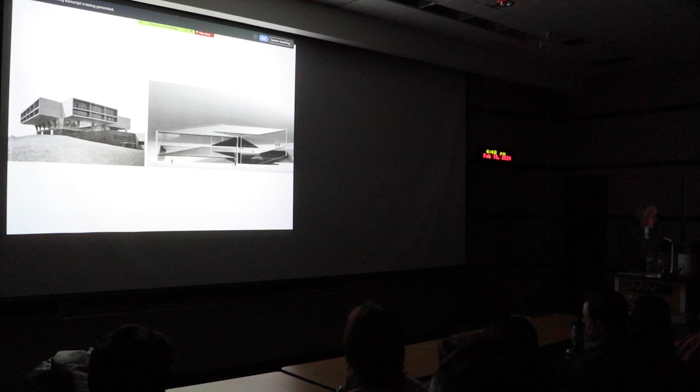As I mentioned, I came from Milwaukee, and as I was coming of age, this is Eero Saarinen's Milwaukee Art Museum. And so this is what I grew up with. And coincidentally, when I was working with Gunnar Birkerts, one of my early mentors as well, my first project there was to be the lead designer on the Houston Contemporary Art Museum, which is what the maquette on the right is generating.

This is a client that I've worked with for 50 years. This was an early patio. So the house on the left, this was a simple call, and you've got to sort of put yourself out there early at one level and have confidence in what you're doing. And for some strange reason, I called the local newspaper in Phoenix, where I lived for more than 50 years, and I had this first patio.

And I called the editor and said, hey, are you interested, how about take a look at it, I'll talk to you about it, let's see what happens. Well, there was a story that ran. It was a little whole budget was $10,000 with a little triangular configuration, putting together an odd-shaped backyard. And Rocky saw that article in the paper, and that became part of a lifelong friendship and a journey, and you'll see Rocky's name pop up several times this evening.

But I drove up to the house on the left, and here's a visionary statement. Never met this man in my life.

I walk into the backyard, and he basically looked to the back fence line at houses that look just like his across the way, and said, I want to screen the expletive house behind me. That's your program, okay? How do you do that? I want to make them go away.

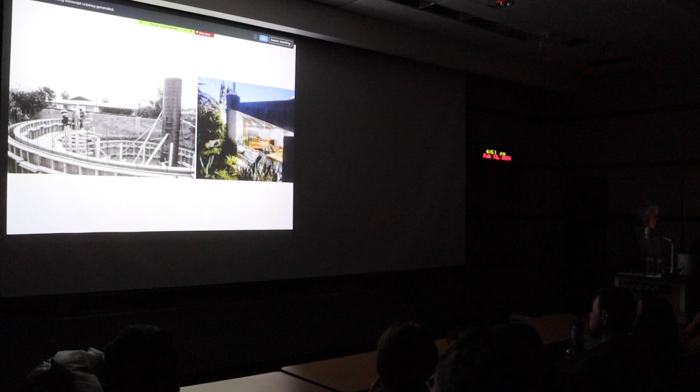So it's always been about making, it's about tools, it's about materials, it's about understanding those things. And again, inspired by my set of mentors and things like that. Definitely, hopefully there's roots that you can discover seeing that.

And then you get your first job, and you get your license, and you're ready to hang up your shingle. And I had one project. It was a $10,000 budget on a cabin that would sleep 13 people in Flagstaff, Arizona.

And this is the Galloway cabin. And there you can see the evolution that happened. The whole thing was built in 4 weeks. It finished over the course of a period of time, and it was ongoing.

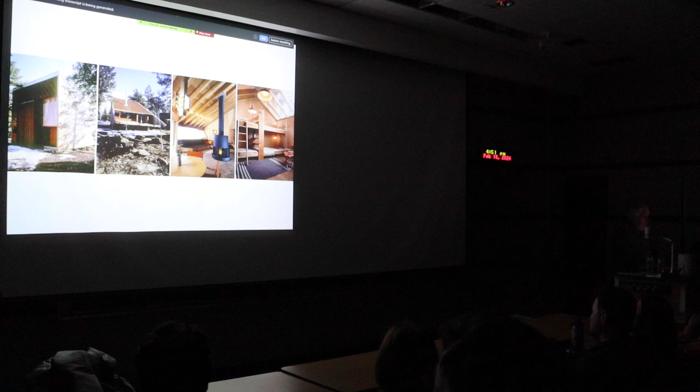And at that same moment that cabin is rising as one of my first projects, I had acquired 10 acres of land north of Phoenix, a place called New River. And this is my home there that was built in 4 weeks in the summer.

And my studio was a small structure on the left. I lived on the section that you see the interior of. It cantilevers over the desert. It had a budget of $12,000.

And a couple years later, under the rainbow, I built a studio that took a little more time and a little more energy, but not a lot. And that became home where I would work for many, many years.

So then a random series of images here. Again, this is way before computers. I traveled, I looked at lots of things. You can't go and see enough examples of things you admire, and some you'll be thrilled with, some you'll be disappointed with, but it's about constantly seeing as you journey not just through your student days, but through your life.

So this was for a sheet metal worker that was doing some work on my house, and one day I came to the job site, different job site, and said, my wife and I have been talking. We just got this parcel. Would you consider doing a house for us? I was flattered. It was great. It was wonderful. I got this master metal worker.

I've got this man with a great appetite for making things, and he's wanting me to design a house for his family. And so these 3 foot thick stone walls that you see delineated at the perimeter of this triangle here are desert masonry, in the spirit of what Taliesin was all about. And he proceeded to assemble this 15,000 pound steel 3-dimensional sculpture on the ground next to it.

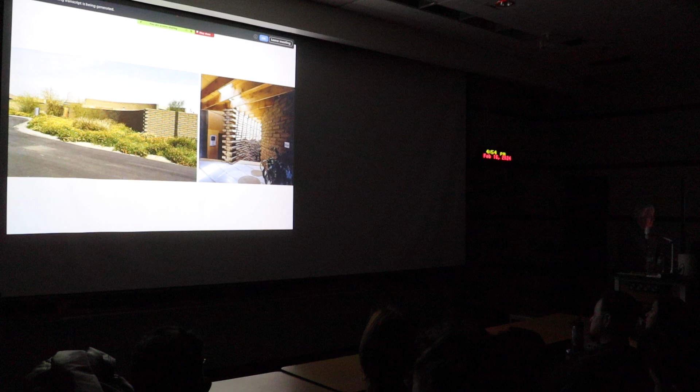The broken block house—again I got into this weird thing that was interesting, and a lot of my clients didn't have budgets at all. So suddenly I got the idea: why don't we just get a bunch of broken block, assemble them, and sandblast that configuration. They wanted a stone house in the desert. This is in Cave Creek as well, and the random pattern of those broken block laid just by regular masons—they didn't have to think about being precise. So again, the effect was there in the broken block house.

First commercial work starts—suddenly you bump into a circumstance and something's there. This is one of my first commercial buildings, the J.L. Bamerlin Postal Credit Union. Those are 17-inch thick burnt adobe walls, and that's Cor-Ten—probably the first use of Cor-Ten in Arizona. In the middle image is an office corporate headquarters, a small building for Carver Air Conditioning. They were a sheet metal worker who put up a Butler building and decided they needed some office space. So this became the office space on the front of a Butler building on Washington Street in Phoenix, Arizona.

And on the right, I do car washes, and I say that proudly, okay? I had another client, Jerry Weiss, who was caught up in the whole energy of it, and he said, would you be willing to do a car wash? That's after Central Library had happened and a whole bunch of things. It's a project, a building, an opportunity—somebody with the vision and courage to go somewhere. So on the right you see a simple diagram of 2 cantilevered weathered steel beams and a rolled conveyor belt cover assembly, not unlike the office building. It's a car wash—the Weiss Guys car wash up on Glendale, just west of the freeway in Phoenix.

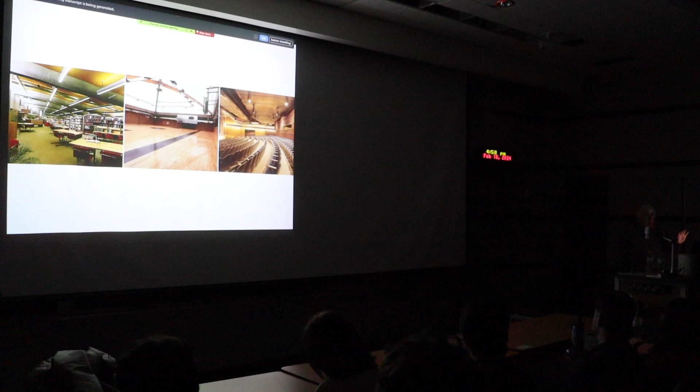And then we have the Phoenix Day School for the Deaf, a gymnasium and a theater—very simple, very low budget. But budget should never be your excuse not to do architecture. Never let 'the budget isn't big enough' be an excuse for what you get. What you should always give is what you can optimally give, respecting the budget, because it won't get built if it's not. But again, small or large, always push yourself to an edge.

Where it came from in my mind, I don't know. I had some very special mentors, but somehow early on in my development I got this inkling—with my maverick background, where would it come from? But I was going to get a Rome Prize and go to the American Academy in Rome when I could. Literally the day I was eligible for that possibility, I sent off my little portfolio. I was going to do this big elaborate portfolio, but it ended up going in a little 3-ring binder. Because I said I was going to do it, I did it—it wasn't the fancy binder I might have dreamed of.

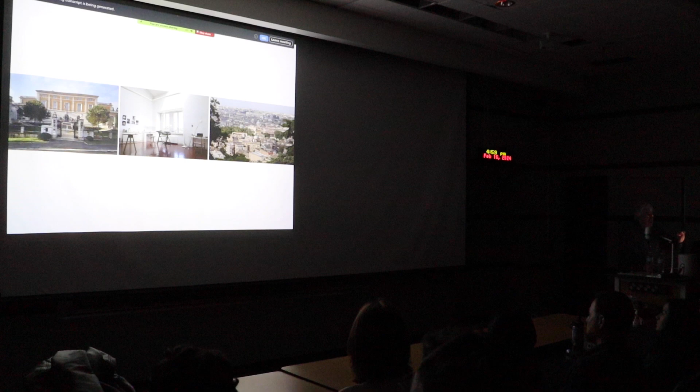Somehow they looked through that portfolio and my proposal of work I had done, and I ended up spending 6 months there—my studio was right over the central gate, on the top floor, and you see the view from that. In 6 months, I gave myself the privilege of expanding myself to a place I'd never been. There was a very deep impact from the work of Carlo Scarpa, of course. But again, a turning point—I sort of look at my life as being pre-Rome and post-Rome, and I mean that with important sincerity.

This is an earthen dam. This is the Deer Valley Rock Art Center. The petroglyphs on the left—there were 7,000 petroglyphs etched into the desert varnish on the mountain on the west side. Where the earthen dam that was part of a Corps of Engineers project would collide with the mountain is where the simple little geometry of a museum telling the story would happen.

It's tilt-up concrete. You can see how the joint configuration is there. You come along the edge of it as you approach the site. You park your car, go through this funnel-like form, come out this serpentine path down to the rock art location at the south end. And that's the Deer Valley Rock Art Center.

Again, tilt-up concrete, but the coating of those panels takes on their unique quality, not only because of the geometries that you see happening, but that coating is copper slag. So it's a waste material.

I wanted rough texture. At that time I was possibly even teaching here, and I had a project with students near Superior, Arizona. I remember driving by the copper slag from the smelters over there. All of a sudden you're thinking about this thing, trying to really make it of the land and the space. This mountain is covered with these black varnished desert rocks where the petroglyphs are pecked through. So it seemed like the ideal circumstance to complement the situation was to use this throwaway material on the face that was down in the casting beds.

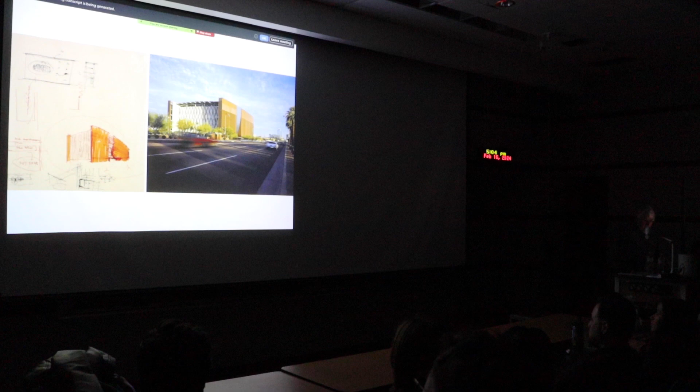Which is 280,000 square feet. It was done for $97 a square foot when it was completed in the 90s. So again, it's pushing the max—no excuses about where things are at. The copper skin of the library, and again, the metaphor.

A mesa from Monument Valley. It sits on the landscape above the freeway of Phoenix. It is copper clad because, again, what's a more precious material when you think about Arizona? It comes from this place, copper.

The technology for this rusticated skin, the heavy roll texture, was rolled by grain elevator manufacturing techniques. So the same galvanized metal grain elevators you see all around Arizona—I asked them, they never did it, but they were obviously not going to have a problem rolling copper. It's much softer, much easier to do. The whole skin of this library is clad in grain elevator siding and press form truck siding in copper.

The south side, and again, I guess I've always been thinking and dreaming and beyond, and taking the opportunity that's there. So I have this project suddenly, and who do I call to be my consulting engineering team? You saw in the early projects, I've always respected my engineers and gone to the max.

But I really respected the work of Ove Arup and Associates. From the Sydney Opera House to Centre Pompidou, their name is attached with the great architects of our time on all those projects. So what can they say if you call them and ask if they'd be interested in being on your team? It's a $28 million project, a studio of 6 people, but you called. And they said yes. They said, but you don't have to get up so early—because I was making the phone call and they knew it was about 5 in the morning here to call England and their offices.

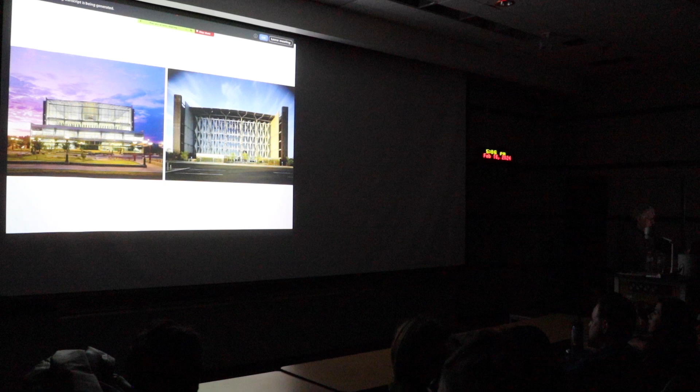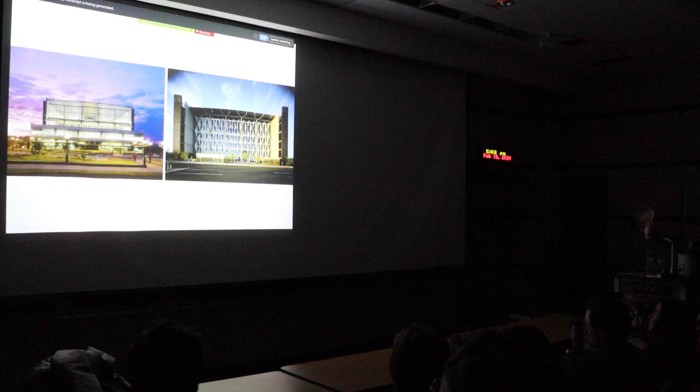The south side was operable, with a computer-programmed horizontal louvers for the south sun. The north side was a different aspect of sun control, so there's these sculptural fabric shade sails. It was a cable and steel rigging roof that spans across.

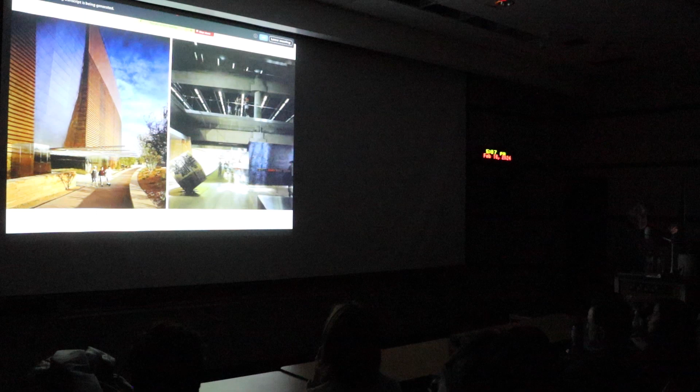In the simple diagram of it, behind these copper facades on both the east and west, those are called the saddlebags of service. So all the building services, including things like the restrooms, the janitor's closets, all the mechanical rooms, live in these bulbous sides on the east and west elevation, feeding to the center of the plan.

And there's this stainless steel canyon. These are stainless steel plates shingled down, much as Wright's houses for the Usonian period were done, the Pope-Leighey House years ago. So there's these shingles of 4-foot by 12-foot stainless steel sheets overlapping in the canyon cut through the mesa. And these great cantilevered beams give you the identity of the main entry on Central, and the main entry into the parking lot, which parks 408 cars.

You come down this compression into the canyon, and inside the mesa is literally a canyon that you are looking up to. You come down, there's light on your left side, there's this Venetian plaster on the right, just like Scarpa would have used. And this is looking down from the Crystal Canyon into the entry with 3 glass elevators rising from a reflecting pool in the center.

And again, I knew what the budget was. I knew it was less than $100 a square foot to meet all the needs. And you just put all the people and the things into play, and it becomes that evolution.

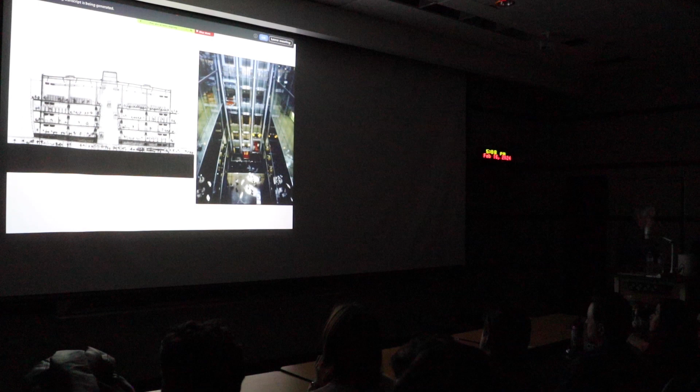I'd be kidding to say I'm not always stimulated by things past and things present. So that's Labrouste on the left. That's the Bibliothèque Nationale, of course, a library by coincidence. That was the major inspiration.

And the assignment I gave to Ove Arup, who I had not worked with before doing this library, was: I want us to do is there's going to be a great reading room at the top, and my goal is to make the roof float on light.

And we're going to do that, gentlemen, by putting an 8-inch skylight on the east and west perimeter. So there's a continuous 300-foot long skylight, and over every column in the space will be a skylight, a 7-foot round skylight. So that became the sort of goals or aspirations of the project, and then working with them very closely, with them having all the resources to know what that could become.

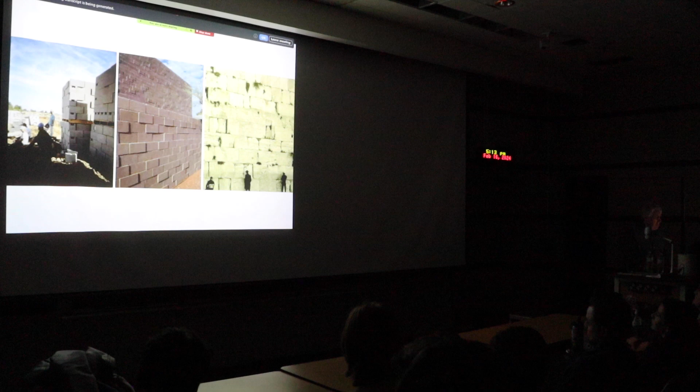Here is our leaning wall, again with a very tight budget. It's a very orthogonal, simple construction of just simple TJIs. But the facade—the east-facing facade, where the sun rises from—leans and is curved. So you have that one leaning wall, while everything else is straight up with this random pattern. And that wall is laid very precisely with no offsets in it.

Then on the east-west walls going back, you can see through this clerestory light how the sun comes into the sanctuary. So, very simple tools—this was probably built at the time for $60-some a foot.

I like houses. Houses are great projects for you to experiment with, to play with. You have interesting clients—they have excitement, they have stories to tell, lives to live. So this is the Hill Shepherd residence. Again, these are low-budget buildings.

As you drive by it on the street, it's just a suburban street up near Squaw Peak in Phoenix, and you'll drive by the house and probably miss it. But this is the house you see—it's a courtyard house, and along the northern edge of it is this canyon entry. As you come around the corner just to the right of the garage door, there's a gate, and you turn and see this progression of space.

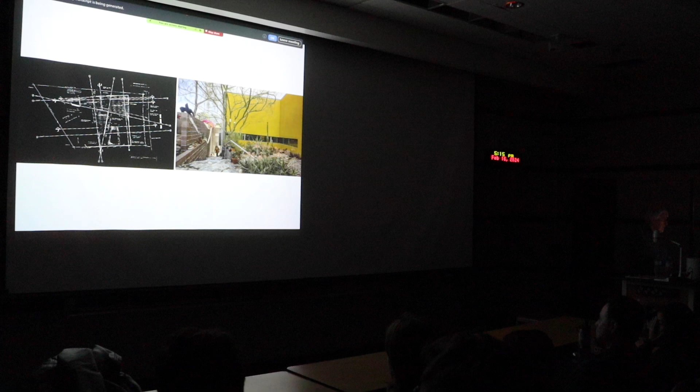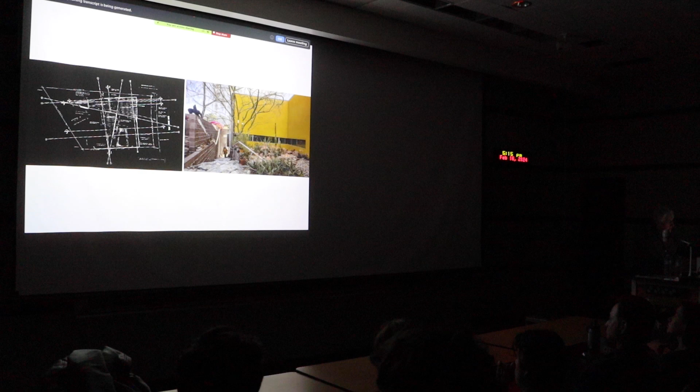Okay, different ideas, they keep evolving, they keep changing. This is the Byrne residence. Again, you're seeing things that, oh, you showed us that, but where'd this come from? So suddenly this is a whole different geometry, and all the walls lean. They lean out and form, again, these organic canyons.

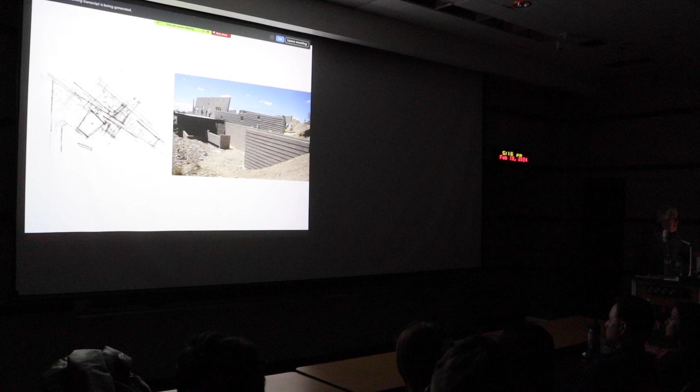Just ordinary concrete block, sandblasted carefully. These are skilled craftsmen laying these buildings for me, but for nickels on the dollar. So there's this house.

It was interesting because you have an idea, you evolve it, you build models, you have renderings. Everything happens to scale very early on in my process. But it wasn't until all the scaffolding was down and I'm leaving the construction site one day that I looked back, and I hadn't consciously said, I'm going to make the house exactly match the profile of the geology beyond. And it was a very happy day when I saw the scaffold down and I looked and, oh my God, what have I done?

So I guess it was there in my mind, but it just wasn't a first goal. When I put the first thing down, it wasn't that, gee whiz, this is an opportunity. But it's sure a nice coincidence, and I'll take credit for the coincidence.

Again, here you can see how it rises out of the ground. Again, light's always something I'm looking for, grabbing for, thin edges. There you have the roof deck actually forming a crenellated edge that's forming the overhang of the house. And there's a 4-inch skylight between that roof and that leaning wall, the full length along that, which again is seasonally and daily a real treat.

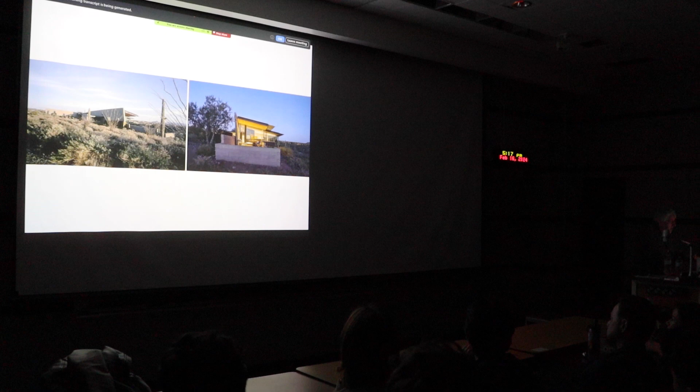Again, different houses in different places, and I do know how to spend money with the best of them. And this is a house on the East Coast, the top one. That's the Horn residence. That's a continuous bench that is resin. That was actually, the resin came from Arizona, or the fabrication of it did, but a stone house with zero joints, you barely see the grout.

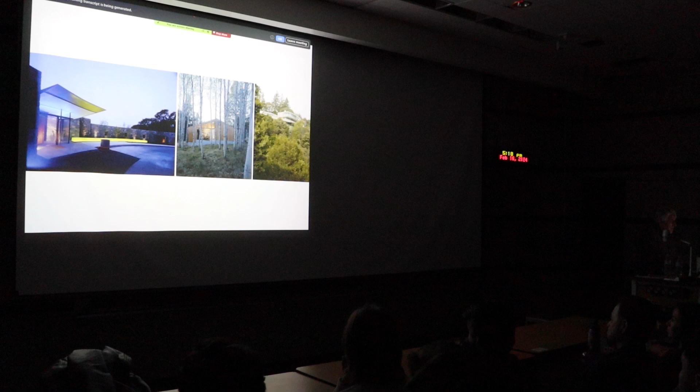This is the Riddell residence up in Wyoming. And this is a house overlooking San Francisco Bay on the right.

And then all of a sudden, multiples became part of my opportunity. I had a client, and they were interested, and they'd bought this little lot in Scottsdale, and it was a developer, and the developer likes to make money and wants to optimize the use of land. And the question was, how many units can we get on this little lot?

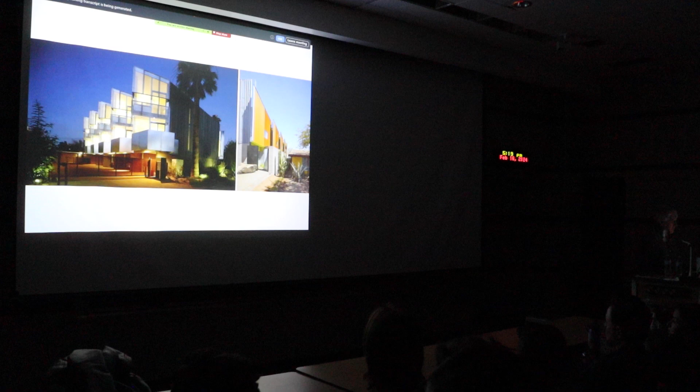And somehow I put this little collection together of these parallel masonry lines, little tilt of the 45-degree facade that you see on the left, so that every one of the units has the idealized view and the perfect view of Camelback Mountain. And you enter along the south side with this expression again of the units. Again, extremely budget conscious, always is, and these are views of the entry.

And that was a fortuitous project because the person that bought unit number 1 is Louise Roman, who was a friend at the time and recently widowed, and she's sitting back about 4 rows here tonight. So it's been a good life for the last 20 plus years.

Always a good life. But this is our living room and the view that you get of the mountain and the entry down below. And you come up and there's the view of Camelback through the glass there. The master bedroom is above the living room. And then there's this wonderful south-facing deck up on the top.

I'm not afraid of color. I like color a lot. I like natural materials a lot. But this is a color called Pungently Optimistic Green. And it has a bite to it, okay? It leaves a good taste in your mouth.

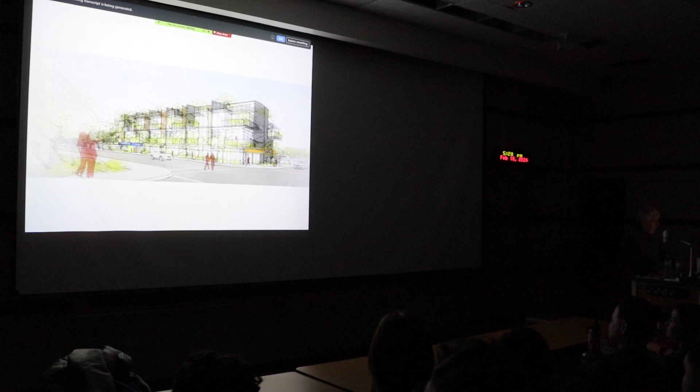So the multiples then evolved into more multiples after that. Interesting Canadian developer, and suddenly we're doing 7 units. That became this project. That became this.

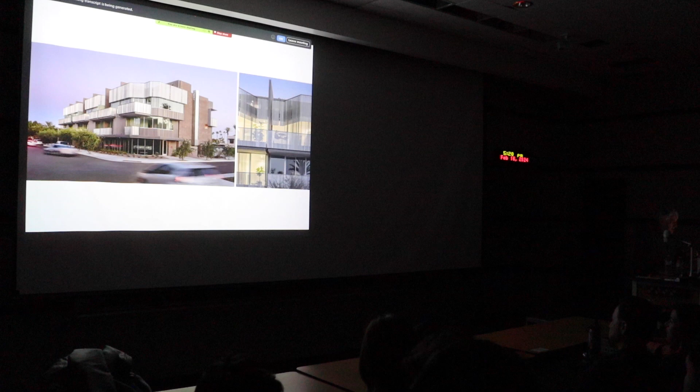Again, combination of zoning and live-work. All these things go through design review, the most rigorous project process in our communities. They're concerned about design, and sometimes it's hard to wonder how that could be the case.

I think we're moving to another location here. Yeah, this is Billings, Montana. Again, you do something and it forms a conversation. You have a happy client, you're happy, things are there, you've got things you're going to learn, always go learn, never going to do the same probably, but it's about learning, it's about growing. We're never going to do anything perfect, but it's about always trying to be perfect, always trying to reach beyond.

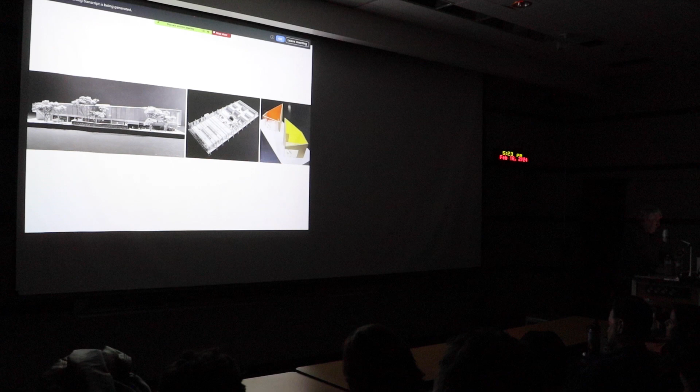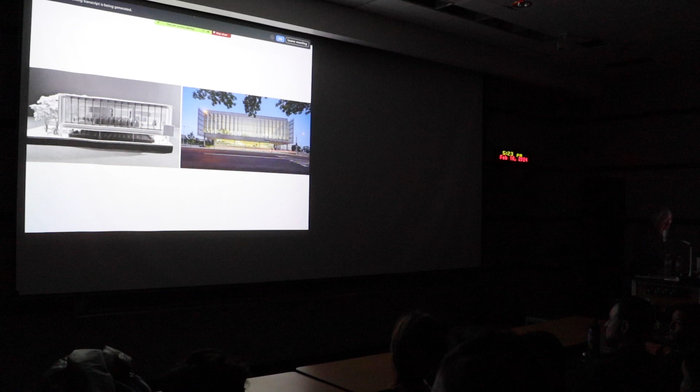The model, the study model—see all the people? And this is the completed building. Again, I think it's LEED Platinum. So again, you don't ever have to not be doing sustainable buildings and using the excuse of budget or whatever.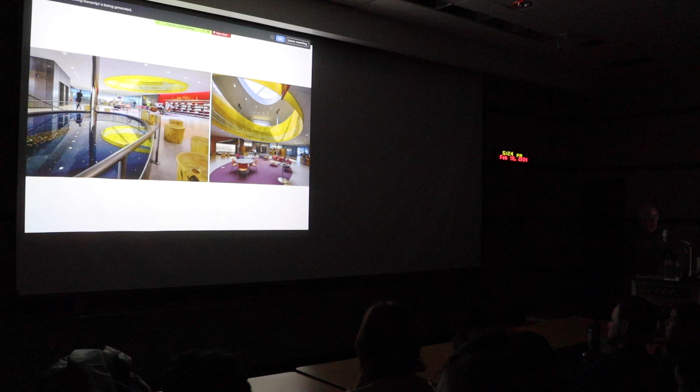That's entering at the first level, the reflecting pool, the play of light and water and daylight and the manipulation of that. Light is a material that I hope you all will be intrigued with and have a passion for using.

And this is the view up in the story cone. I do these cone structures quite often in libraries for story time, and there you can see the kids at the bottom. If they're looking straight up, what they're seeing is, again, the changing lights in this story cone. That is the story time of the Billings Library.

This is coming up into the reading room. You're looking through the front elevation there, and then on the left is a scrim, the box rib scrim. Both the left and right side are those side perforated panels, and that's what you're seeing.

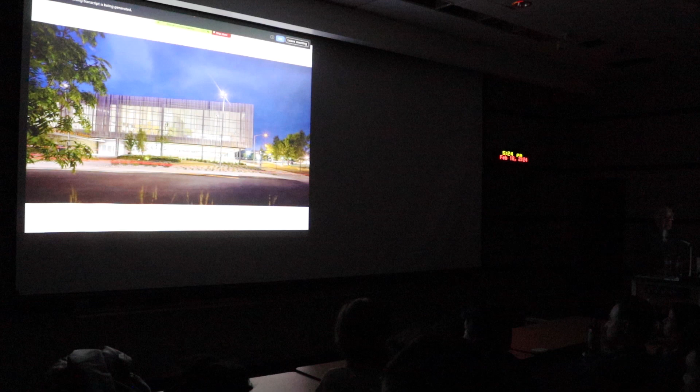I did this little remodel of the Scottsdale Museum of Contemporary Art out of an old fiveplex theater, and it had great success, and it was a fun building. Suddenly in your portfolio you have a museum. So somebody might call you, gee, I bet he can do a museum, because you see one. Somehow that's a big leap for people. You've got to position yourself as architects that you're not just, I do houses, I do this, I do that. Let your work inspire the potential of what you want to do and what you feel you have to give to the community. So Reno called.

It's a gambling town, and that is neon. Architecture was a big word for them, but they were ready for it. And so that's the Nevada Museum of Art on the right.

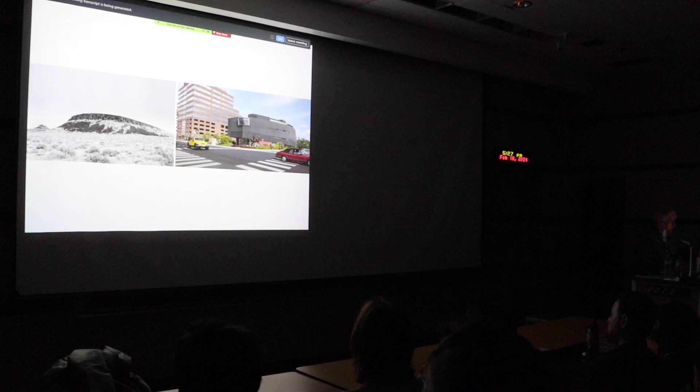That's the inspiration: the Black Rock Desert, which is about 30 miles north of the site in Nevada. That's the inspiration, and the architecture is in deference, in context, inspired by that. And again, that's zinc skin. This one, again, you're given gifts.

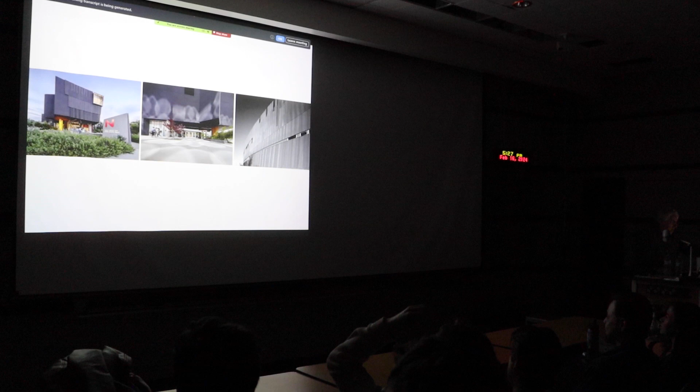You can't plan for some of these things. You can make up good stories afterwards, but it isn't about stories, it's about results. Here you can see all the random textures of the zinc. This is the interior of the building. It's around an atrium.

This is moving up through it, and these again are inexpensive competitive buildings. These are the galleries. This is the upper main gallery, the corner window that you saw in the image a second ago.

This was when we added the school. This is the opening party. This is a little school addition that happened. I've been working on this project now continuously for 20 years, and it's been finished in between, okay? It's been finished, but then they have another need. They got my phone number. Let's go for the next dance, right? So this is the little school addition we did.

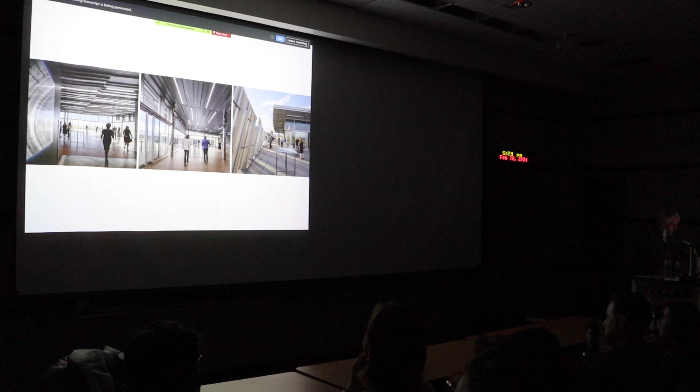Again, this is very low budget architecture. This is a room that happened on the top of our little geologic form. It's on the grid of a lay-in tile ceiling, but why does it just have to be a lay-in tile ceiling? Zero waste, everything's random, broken pans. You can see it very effectively there over in the ceiling on the left, how that ceiling's sort of working. It's all random, and I like randomness. I like the magic of randomness between the skin and the evolution.

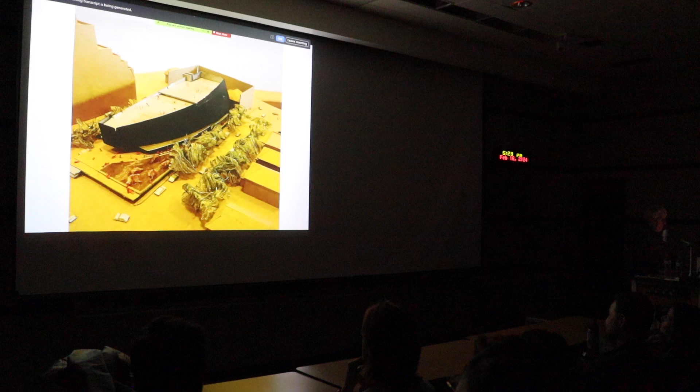So that's how the building looked about 10 years ago, maybe. And then what happens? We just bought the rest of the block. You ready to come back? What can we do with that block we just bought? So that became the first study model: you see the building you've been looking at, and beyond is the volumetric of the addition.

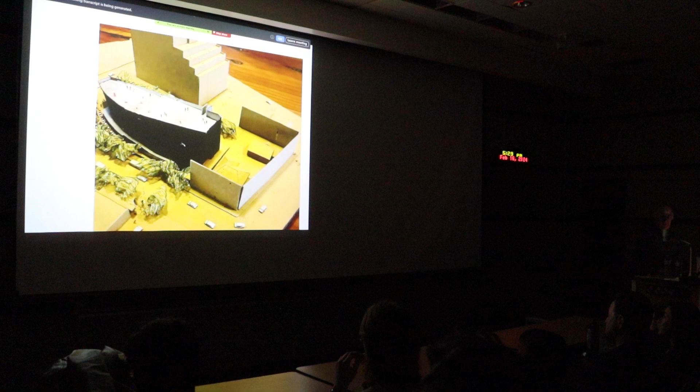There it is, that's a model, but it's the scale, and it's going to the property lines. Those are the houses that were on the site that they acquired. Suddenly I have a new opportunity for a material language because I've got a tight budget, and yet I want a black expansion of this black building, obviously, right?

And so these are Endicott brick tiles. I got the whole array of sizes and surface textures, and some are backed. That one row that's got those little stripes in it, going right down the middle of the side, that's the back of the tiles. And so the whole idea was they're replacing it.

That's my main tile setter, and I'm taking the picture at the right because I'm there as we're making the sample. So it's not giving him a drawing and saying, I'll come back, just go for it. You got to live your dreams. You can't be disappointed when things go awry.

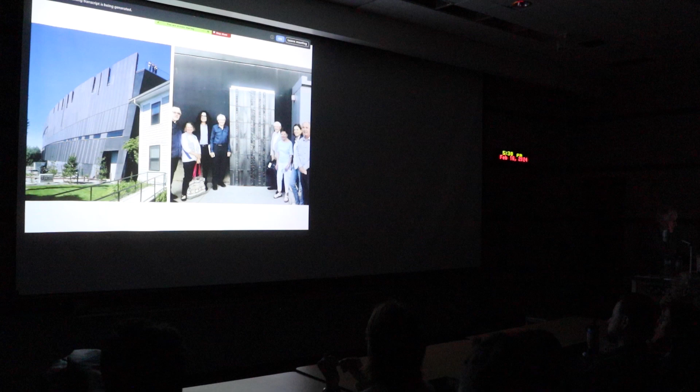Peter Poole's the gentleman in the dark blue shirt there, been on the whole journey from the beginning. And that's our neighbor that used to be next to the building before we did the expansion. So that's the happy client you want, that's the board you want. That's the director of the museum with the long dark hair. That's Peter Poole, who has become a lifelong friend, and a bunch of other people from the board.

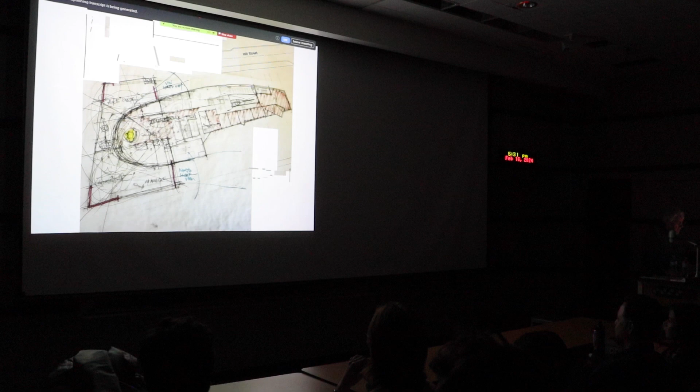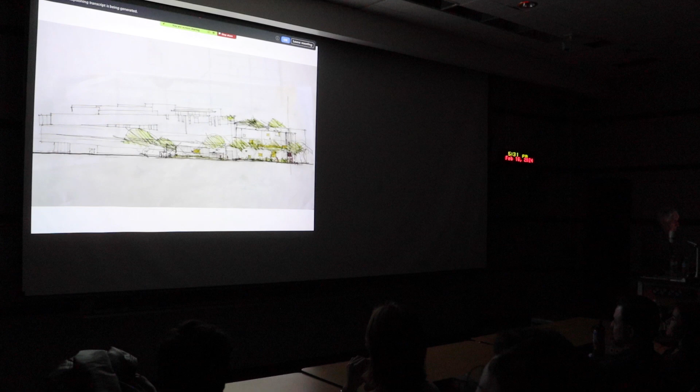Again, sketch. Yes, the working drawings. I have people that really know what to do with a computer, and I can point in good directions. And this is talking about photovoltaics on the roof, study model, and sexy digital rendering with that new skin that you're seeing there on our new extension.

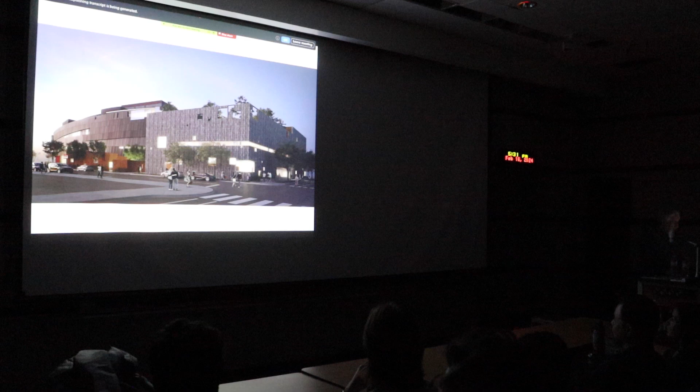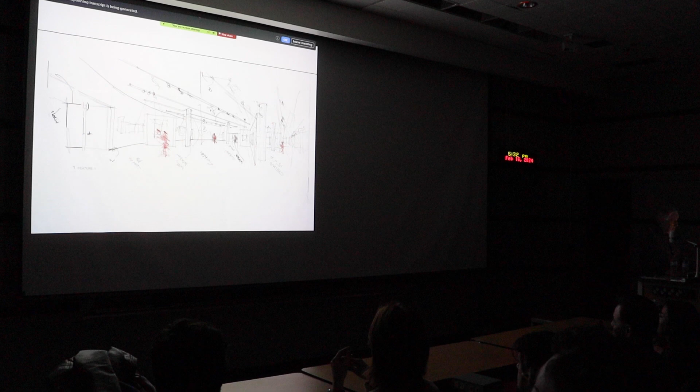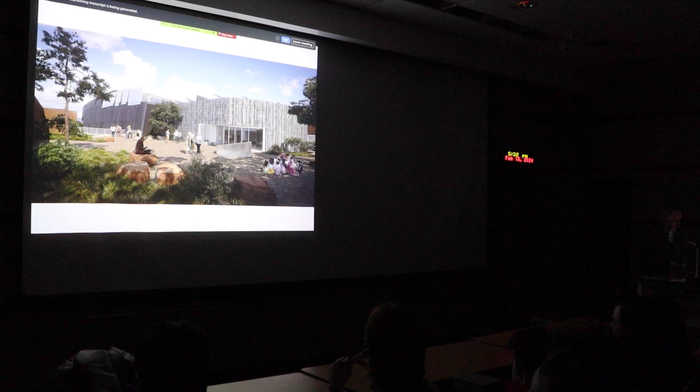Again, which one is the first and which is the second, so that rendering comes after that sketch. But those little red things are people. First sketch, people to scale. Design sketch. And then renderings are interesting and wonderful. There's up in our new roof deck. Again, still working with models, and Yarrow is still the best simulation for it to scale tree.

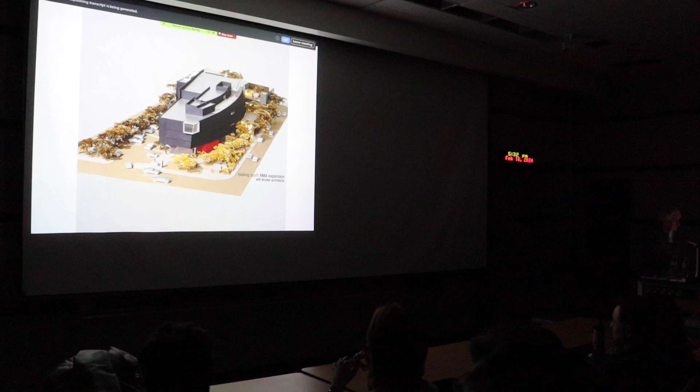And with that, there's a bunch of other things, but I don't want to wear out my welcome.

An architect must be insatiably curious and without complacency. Once you become complacent, please retire. Be both a poet and a pragmatist. You can't forget the poetry, but it's never going to happen if it's not got a pragmatic support. Remember that architecture happens because of the client, not in spite of the client. The client is our gateway ticket, be it private residential homeowner, be it community, be it whatever. Architecture can't happen without respect for the client and what the client's trying to do.